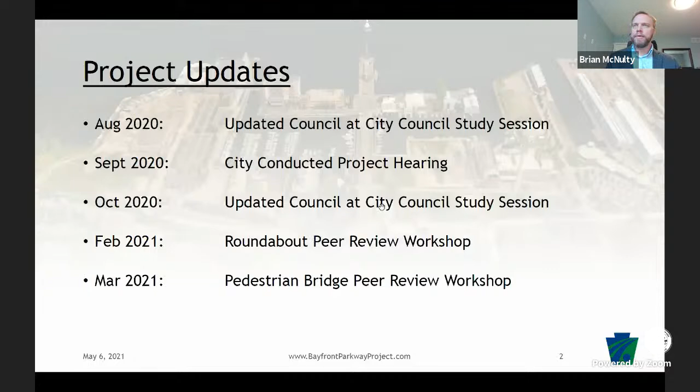Mr. Keys was the representative from City Council, but many of the organizations, including the city, the county, and others that we've been working with so far on our coordinating committee, were part of those teams. So thanks for the question, and thank you, Jen, for the intro, and thank you to council for having us again. It's been a few months. Good to be back with you.

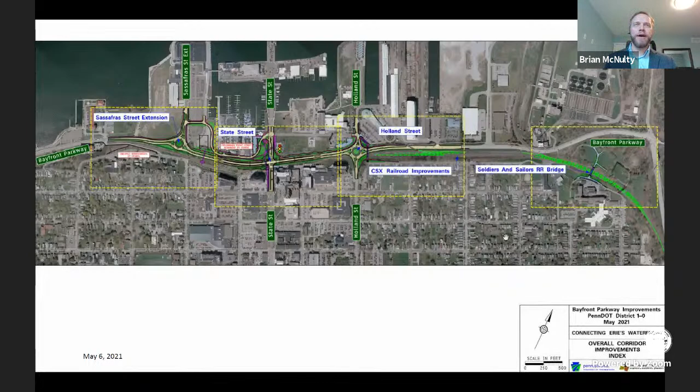Again, it's for the most part the three intersections of Sassafras, State and Holland Street as they intersect with the Bayfront Parkway. And then way off to the east, we have the Soldiers and Sailors Bridge, and we'll talk more about that next. This project is an ancillary project, something that we knew we had to get done before CSX would be able to relocate their tracks. So those green dashed lines show where CSX will be moving their storage tracks in the future, and we needed to build this bridge first. So this is a contract that is out there. We've opened bids on it, and we should all be seeing some action on that project very soon.

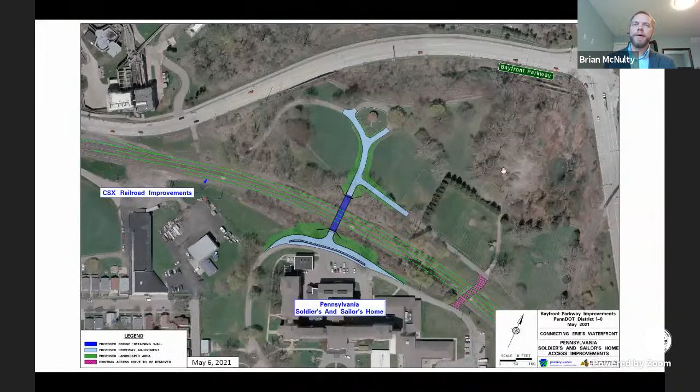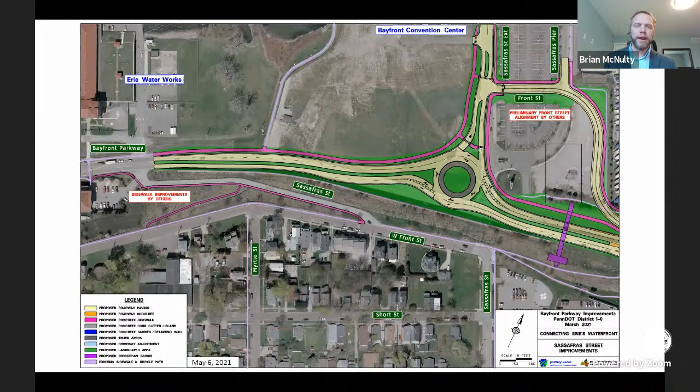So I forgot to mention that, I think, on the last slide, but overall, the preferred alternative for this project includes a pedestrian bridge at each intersection. We'll talk more about that, but as shared before, starting with the first phase of construction, we obtained the BUILD grant and other monies, and these pedestrian bridges at Sassafras and at State will not be part of phase one. Holland Street will have a pedestrian bridge as part of phase one.

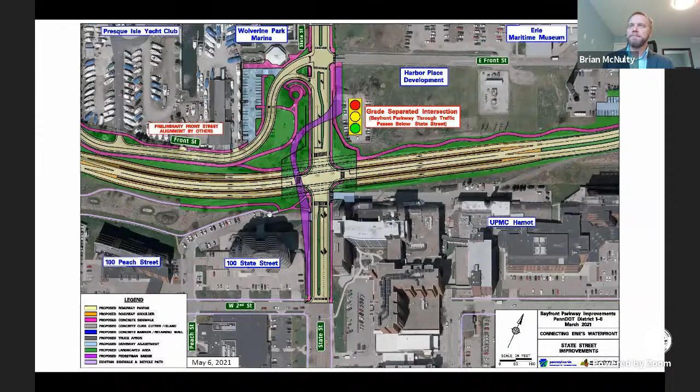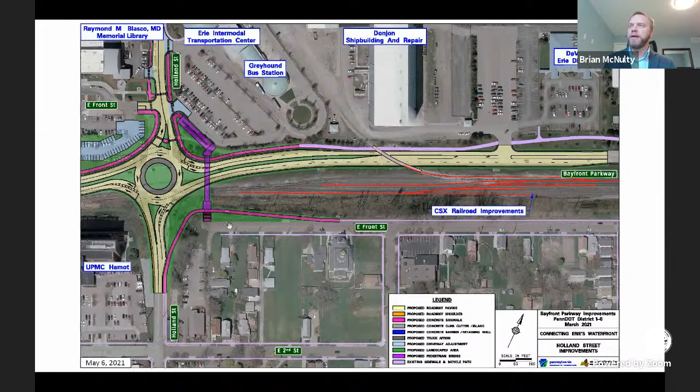So again, a lot of pink showing the connections of multimodal paths that don't exist today. That's a big part of what this project is. Kind of a boulevard look with some green space on State Street, and a lot of green space in the project in general. Here's Holland Street. This is the intersection where a pedestrian bridge will be included in phase one of construction. But similar to the Sassafras intersection, otherwise you've got green space, pedestrian connections, and a dual lane roundabout for vehicular traffic.

So the peer review was in response to some of the discussions that we had with City Council. We've attended, as Jen mentioned, three different meetings where we talked about and answered a lot of questions and concerns. This was an opportunity to bring in another consultant, in this case Kittelson and Associates. They are nationally known experts in the design of roundabouts, so they were tasked with providing a peer review of our roundabouts, specifically looking at traffic operations and geometrics, pedestrian improvements, and so forth. Kittelson and Associates is involved in a lot of nationwide research projects and guidance. They've got a great history and experience in this area, so they did a great job with the peer review.

I won't include everything that they did and shared with us, so this is just the high level overview. They looked at three different scenarios, increasing in roundabout size from one to three. Three being the current plan, which is shown on your screen now, a dual lane roundabout at every approach. Scenario two was to reduce the Sassafras Street entrance, or approach, to just one lane.

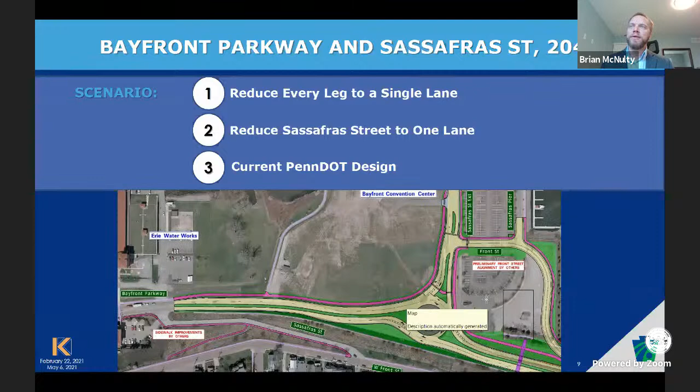Scenario two, on the other hand, was something they recommended as being acceptable. It includes a reduction in lanes on that Sassafras Street extension. Instead of 2 lanes entering the roundabout, it would only be 1. That was their assessment, and I should be careful as I'm speaking for these firms that do great work. They're the experts in these areas, not myself so much. So we have them available for more technical questions on the call.

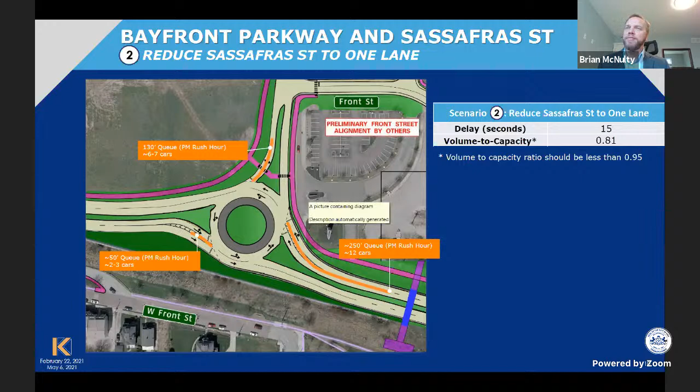This is a win for the project, I think, I hope many would agree. This is a place where now that pedestrian crossing is reduced significantly, and it really allows us to provide a bigger splitter island here, which again is an opportunity for green space, and more green space beside that lane as well. So I think the pedestrian experience would be significantly better crossing that leg of the intersection. That was one of the outcomes.

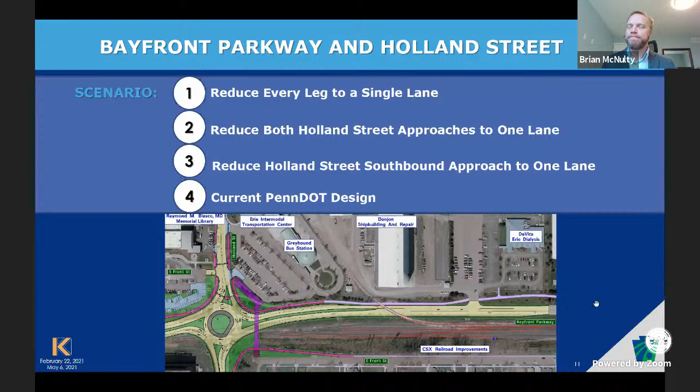They took a similar look at Holland, very similar look. In this case, they looked at 4 different scenarios. Of course, Sassafras is only a 3-legged roundabout, since there's no southern approach due to the wall and the bluff. In this case, we have a four-way intersection. So they looked at the first option, to completely cut it to a 1-lane roundabout on all approaches, then to just reduce Holland Street approaches north and south to 1 lane. The third was based on some of their findings that showed it might be an option to just reduce that southbound approach to 1 lane. As you can see in the plan, this is the current PennDOT design, which is scenario number 4, and that includes dual lanes.

Their findings were very similar, and ultimately through some discussion, determined that the same could be done here. So where the pedestrian crosswalk is on Holland, on the north side of the intersection, where we had 2 lanes shown prior, this would work. There would still be a queue. When you see queue, this is a 120-foot queue in the PM rush hour, approximately 6 cars at the PM peak that would back up on Holland Street with only 1 lane. That's something we can live with for the sake of the improvements gained. Everything's a trade-off in these areas, so that's a little bigger queue than was provided on the current design that had 2 lanes, but we can work with that.

Again, same benefits there, that the pedestrian crossing of that lane was reduced nearly by half. So that's another win. Volume to capacity is just a way to measure whether or not the designed or planned roundabout can handle the anticipated capacity. That's a ratio that, if you're doing this right, you should have a number less than 0.95, and that was just one of the many ways that Kittleson checked to make sure this would be acceptable.

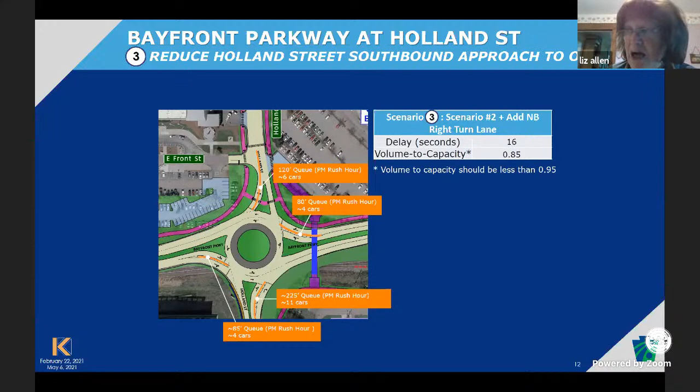My third question is, we do have a new administration since our meeting, our public hearing. We have a Secretary of Transportation who has made environmental justice a hallmark of transportation policy. We had an interesting meeting today about a totally different topic, and have heard that with a change in administration on a totally different project, not related to this, there will definitely be more attention paid to environmental justice. So I guess I have 3 questions.

Who's on the peer review committee? You can send me that later. Did the peer review committee agree on this, or was there still disagreement?

Because it doesn't help us to know that, okay, PennDOT changed its mind. What did the peer review committee, how many people are on it, and did they actually get to vote? And third, will the impact of having a new Secretary of Transportation cause PennDOT to rethink a $78 million project that goes through the heart of the city? Is there a way to rectify?

I was looking through some old stuff, and I happened to find a story from the Atlantic from 2015, How to Decimate a City. It's all about how these urban highways have to be fixed. So Brian, if you could kind of go through that.

Peer review committee, Biden administration, and then a pandemic too. I mean, work habits, has that changed? So it's a lot of questions, but hey, we haven't talked to you in months, so I'm going to take advantage of it. Brian, why don't we tag team this?

Because you're right, Liz, you have a couple subsections of questions there. So I'm looking at the attendees for the peer review, and Brian will send you the detailed list, but just for the good of folks watching: there were representatives from the City of Erie, Erie City Council, the Governor's Northwest Regional Office, Pennsylvania Department of Community and Economic Development, Erie County, Erie Community Foundation, the Bayfront East Side Task Force, our West Bayfront, UPMC, Erie Insurance, EMTA, Bike Erie, WQLN Public Media, Voices for Independence, and the Port Authority. I'm also seeing representatives from Erie Arts and Culture, Erie Events, Scott Enterprises, FHWA, the State Transportation Commission, and obviously PennDOT and our consultants. So I think we had about 35 people.

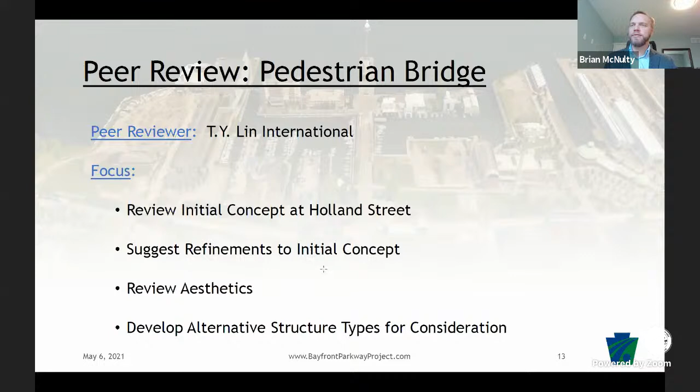It's a little different than the roundabout peer review. In that case, the roundabouts were probably further along in their design process, so maybe there were more technical aspects to look at. But again, it was an opportunity for an additional expert to just provide some ideas on aesthetics and structure. So that's what we'll talk about next.

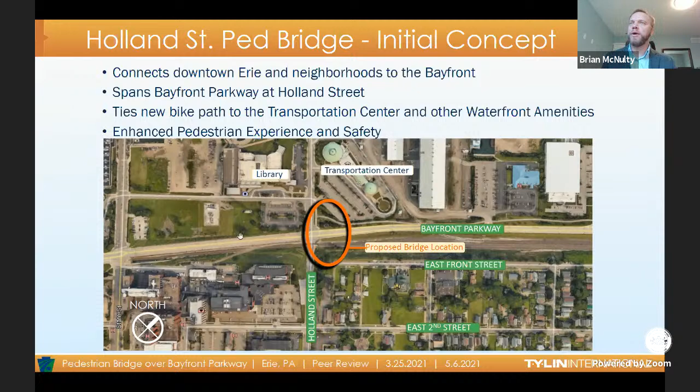The location, again, as we showed on some other slides, is near Holland Street. Based on feedback from multiple public meetings, the bridge is located just east of the intersection of Holland Street and the Parkway. So really it could take off from the bluff, sort of - there will be connections to existing sidewalks on East Front Street and on Holland. This is the location, and we heard positive feedback about it as part of our peer review discussion.

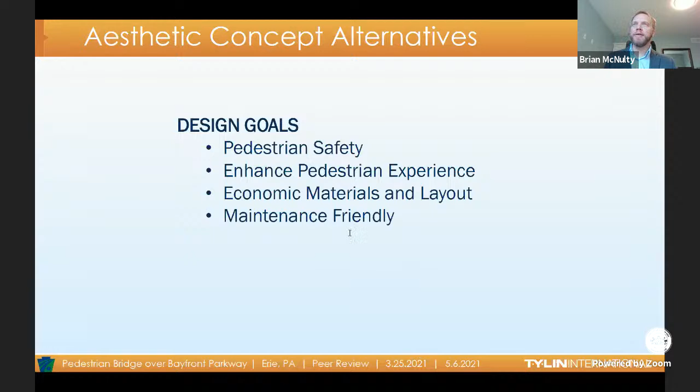So T.Y. Lin took this design, focused on pedestrian safety, enhancing the pedestrian experience. You have to consider the materials and the layout, the cost, the constructability, the impacts potentially to utilities or other things. And then, of course, maintenance has to be part of what we are still talking about here. So I'll show you, I think, 6 different concepts.

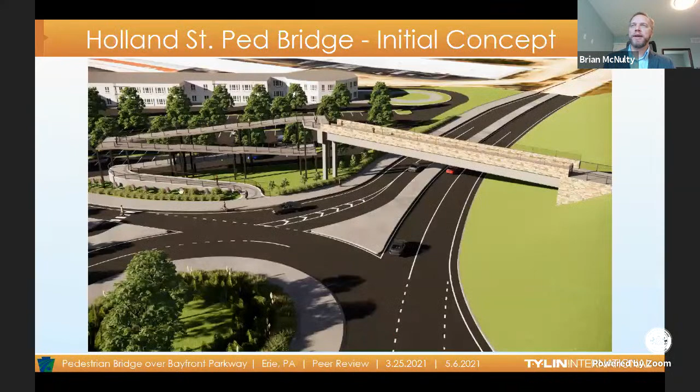So as you can see, I'll go back two slides. This was a little more significant of switchbacks, looks a little more daunting. This is a little more palatable, I think. But again, part of the benefits—I'll show a couple images of each of these, what it would look like from different spots.

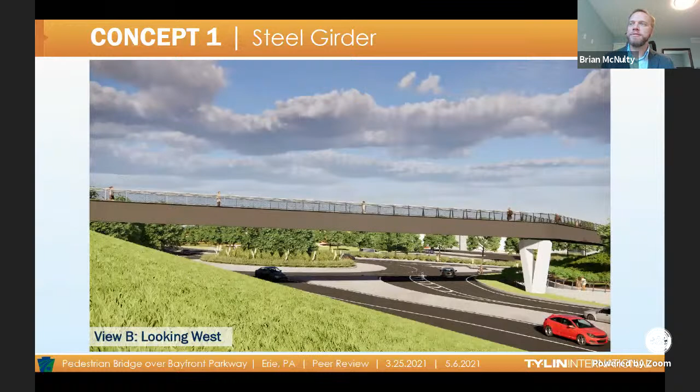This is just a simple steel girder bridge. There would have to be some kind of a safe railing on any structure that we choose.

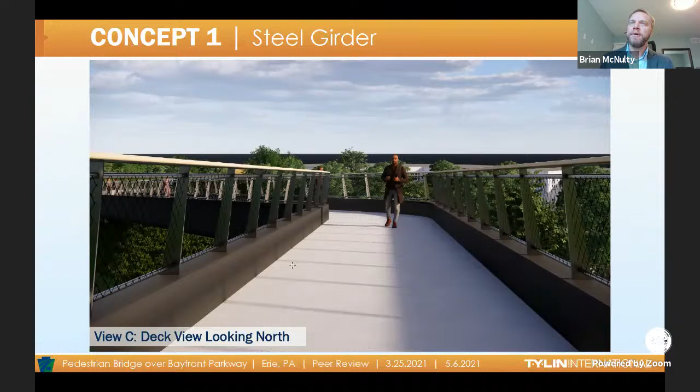In this case, we're still showing the same kind of ramp on the north side, but all of the different images I'm going to show, some include different types of ramps, different types of structures. They're all sort of interchangeable. We've got a lot of flexibility in that regard.

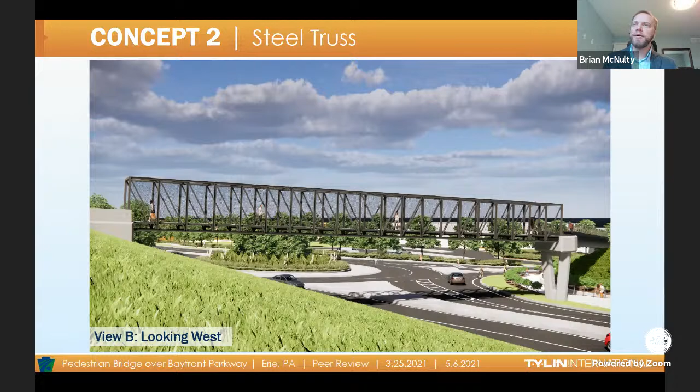A truss is kind of a see-through look more so. Some might like that, some might not. So there's the notion that you feel a little bit enclosed maybe in a truss. Some might feel too exposed because of the way we have it shown here.

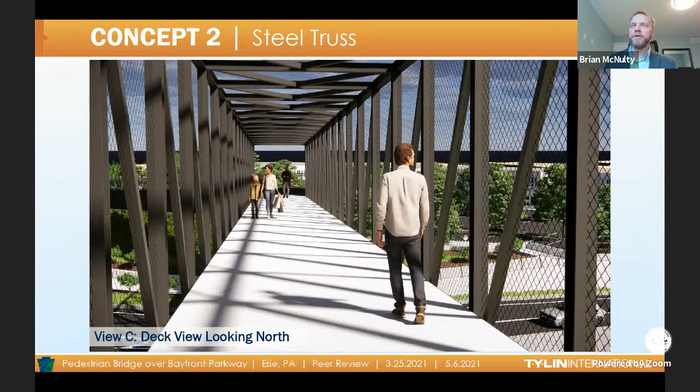We could include a railing with this option. We could also easily include a roof on a truss. That would be a pretty simple task to do. We can include a roof on almost any one of these options that I'm showing you, and we talked quite a bit about that throughout the peer review.

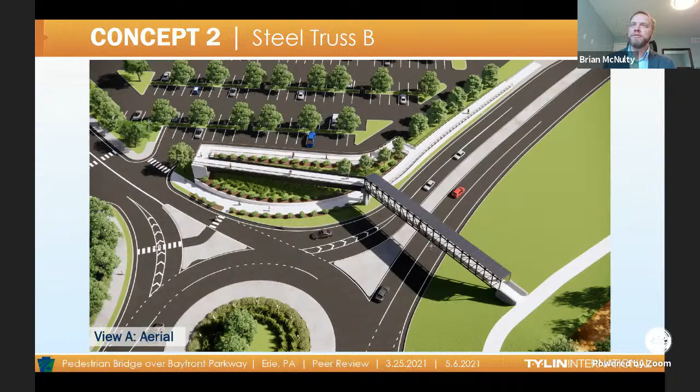And I'd say that there's no strong consensus, but a good point was made that pedestrians or bicyclists using this bridge are exposed to the elements on the trails and sidewalks everywhere else they're going. So is there really an importance to shield them from it while they're crossing the bridge? There's a couple pros and cons, I would say, to that.

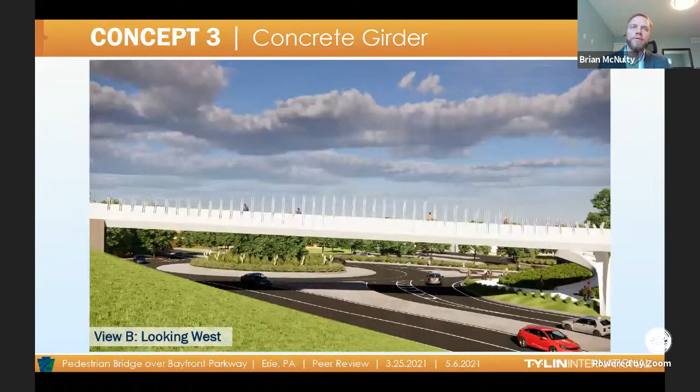But this introduces a little bit of curvature, a little bit more interest, a different type of ramp again in its orientation. And you can see the opportunities for landscaping, public art, lighting, that type of thing that would exist along the path, along the ramp, and in those green spaces. Some more views of the same bridge, what that kind of curvature would look like.

And we really, really appreciate the work again of T.Y. Lin here and their vision. Great stuff.

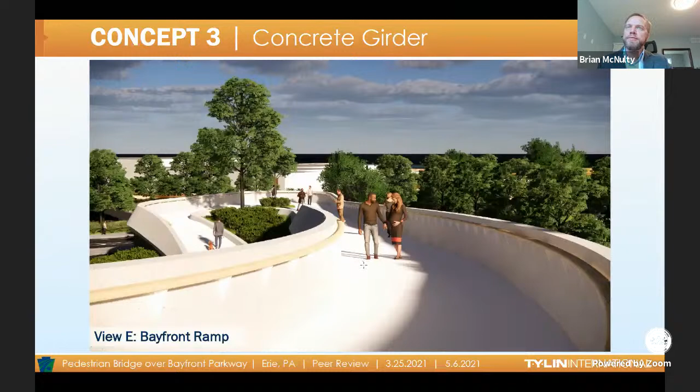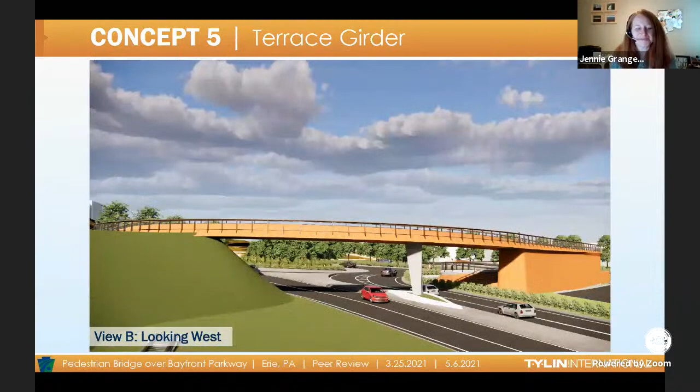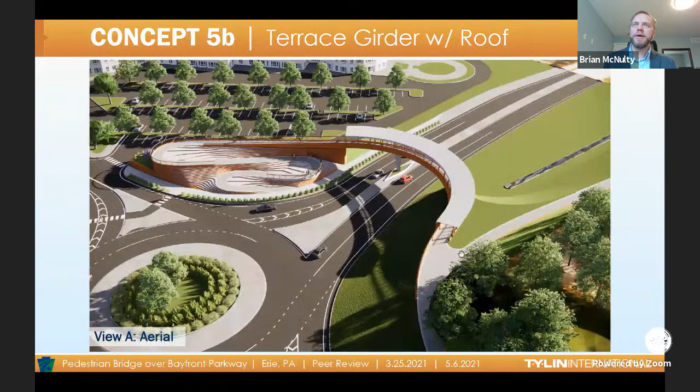Obviously there's different colors, treatments, and materials that could be part of any of these, really. So these were just some ideas. There's another view of the same, again, with a roof. So a roof could be added to any of the ones I think that I've showed you so far. Some it might kind of hurt the appeal of it more than others.

Really a great look. We got great feedback, as Jen mentioned, on all of these ideas, probably some more than others. Again, we didn't vote on it - that was not the purpose of the peer review committee. The purpose was to have some conversations and make sure we're getting everybody's perspective in the discussion. We had a lot of great discussion as we talked through each of these concepts, and that included various ideas.

One of them was presented for whichever bridge we choose. It was asked if there's an opportunity for some kind of a gateway welcoming pedestrians and bicyclists to the east side neighborhood - could that go somewhere in the area of where the bridge lands or takes off from? Absolutely, we can work on that.

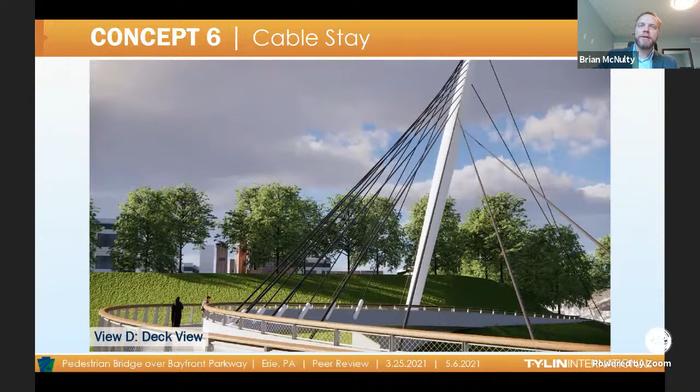So again, I think we got a lot of approval. I think we got some images that touch on the iconic look that many are after here, and some pictures that we just hadn't really shown anything like that.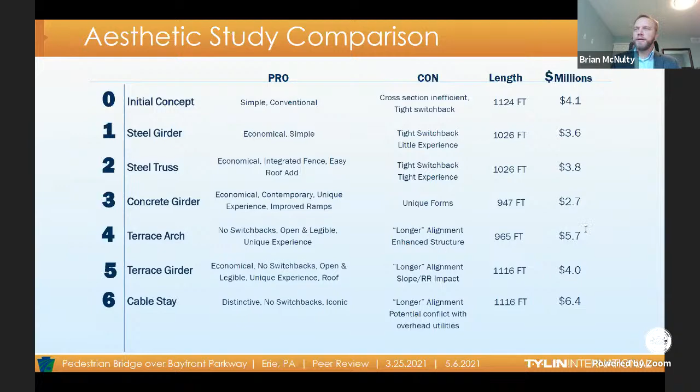So that's it for the pedestrian bridge, and this is just the summary slide again of what we gained from both. I'll go over that real quick again.

Reduced approaches at Sassafras and Holland, reduced pedestrian crossing distances, more green space, larger splitter islands, opportunity for raised crosswalks if we can discuss that with those who will be responsible to maintain that. And similar with the pedestrian bridge: a reduced structure depth, a much smaller switchback ramp, and of course a lot of different aesthetic options.

So I'll pause there, Mr. Keys, if there are any other questions.

I'll speak first, since it's not really in the footnotes where everyone else was available to hear that. I did bring forward the idea of putting an elevator on the north side, a structure that goes into an elevator, just because the length from where you get on Holland Street to where you depart is nearly 1/4 of a mile on average, and I'm a little worried about whether people will be able to travel that far if they have mobility or motility issues. So I just wanted to put that forward first, and then I'll open it up to my colleagues.

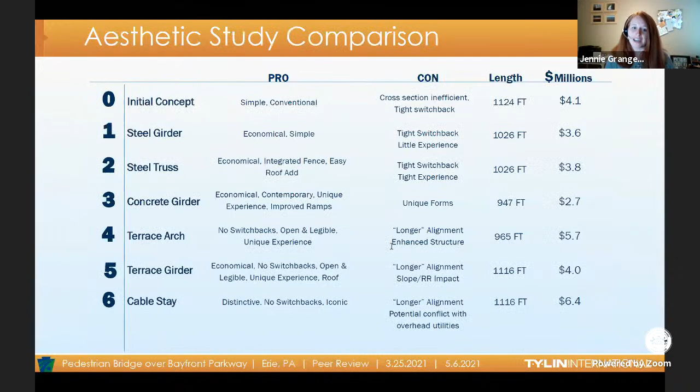There's a lot to consider here for sure. And that's a great point that I don't think anybody had brought up yet. So thanks. And Kathy, again, safety is our number 1 priority. We want it to look good, but it has to be safe. So I think your point is well taken. Well, you also got to consider the skateboarders. Mel, are you with me on that one? Yeah, because I mean, it's beautiful, but a lot of skateboarders coming around that curve, kids see it, they're going to try it.

Brian, if I could, a question about the footprint of that switchback. I mean, we're landlocked, we can't do anything else, we can't take out a row of parking. It's like we have so much square footage and we're kind of squeezing this thing into there. I do like the design of it, but we can't do anything else about the square footage, correct?

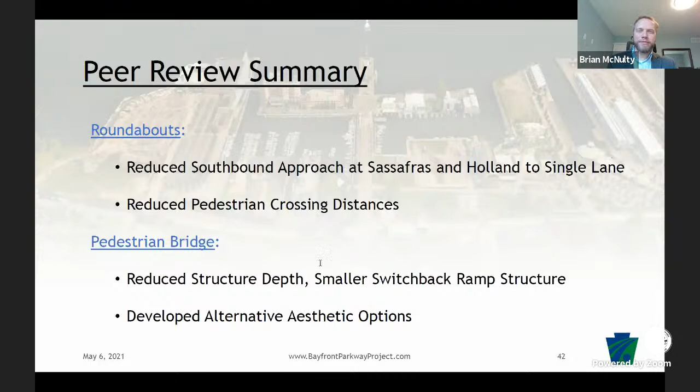We can't reduce the length of it, so no, I don't think so. I mean, we can't take up any more parking or space so that this ramp could be more gradual. I see we can't go past the limitations because every design is kind of cramped up on the corner here. I don't know if we could extend further and take out a row of parking, or if the intermodal is going to allow that.

Yeah, not so happy Dave, with that. I will tell you that was a conversation Brian and Tom and I had with TYLin, and we told them for many reasons, not just the impacts to the parking, that we wanted to stay within the existing footprint.

Okay, yeah, then again it's a challenge. I kind of do like the designs, but the maintenance of the ice and snow is going to be an issue, as it is anywhere in Erie, especially on the ramp surfaces here. So it's definitely going to be an issue.

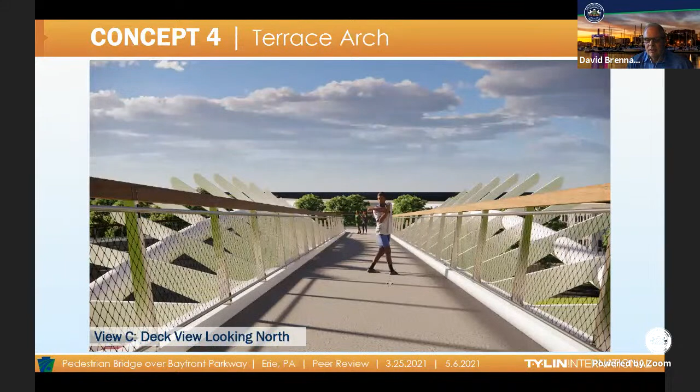Of course, I'd love to see an elevator if possible, especially for people who can't transverse that. And that's why, again, we'll provide that information. It's in the memo, and I think that was one of the concerns, the snow and ice on the Terrace Arch.

Brian, can you just back up one? So the great thing about that is you have your ADA compliant way the whole way down, but then you have these side egresses of steps that people could sit on and have a coffee and take in the surroundings. But again, in less than ideal weather, they are also another surface that needs to be cleared. So that would be one of the downsides to that Terrace Arch concept.

A couple other things. So what will the process be? I know it's a tough part to actually make a selection. I know money, there's maintenance, there's all those things to be considered. So this is the menu, it needs to be sorted through. But who's going to be the jury to do that? Is it just going to be a PennDOT decision based on what we see, and then we'll just find out what that is?

No, that's a great question. There's a couple different avenues that we need to take. We have public involvement, additional public involvement planned in the near future. So this summer, we expect to go out and give the public an update. That would be in addition to these quarterly meetings where we'll be visiting City Council. So a separate PennDOT-led public meeting. Part of it will be to share the information, what's new in the project, which would include some of this information. Now, again, this is an unusual situation.

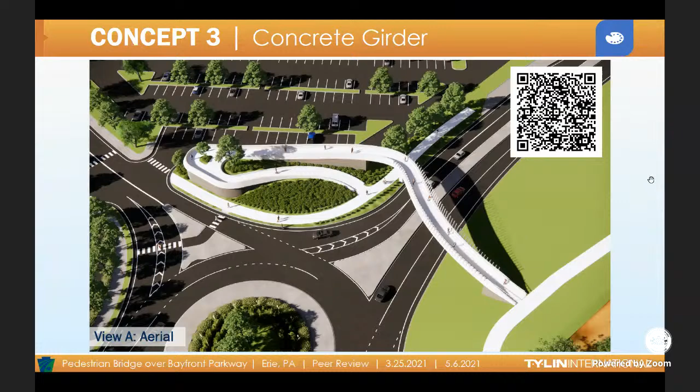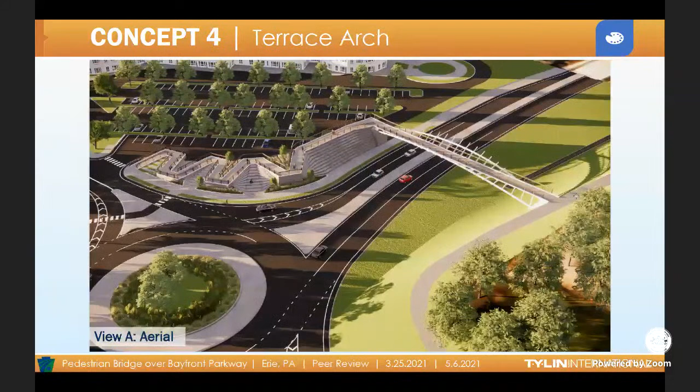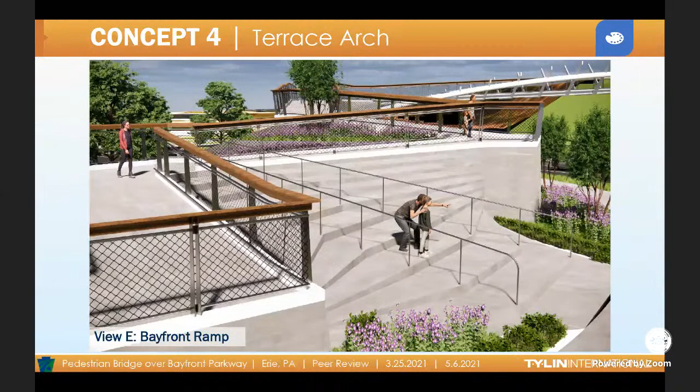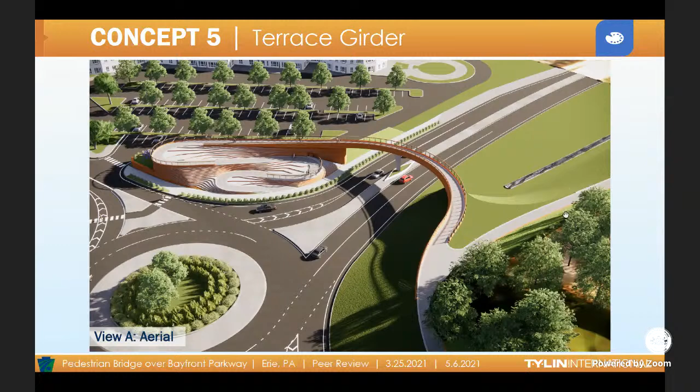Ms. Granger, Jim Winarski here. Thanks to Mr. Frank for getting me on, but I just want to say, yes, it knocked my socks off a little bit here. Very impressed. It's a great update, great presentation. I like the proposed modifications that PennDOT has come up with. David had great questions, Liz had good questions. I mean, a lot of these concepts, I don't know if there's one I don't like, to be honest with you. It's pretty cool that there's that many options. I hope with that many options it doesn't take longer to happen, but I just appreciate the work that is being done and the updates that you've given council, and look forward to moving forward with this project. So thank you all.

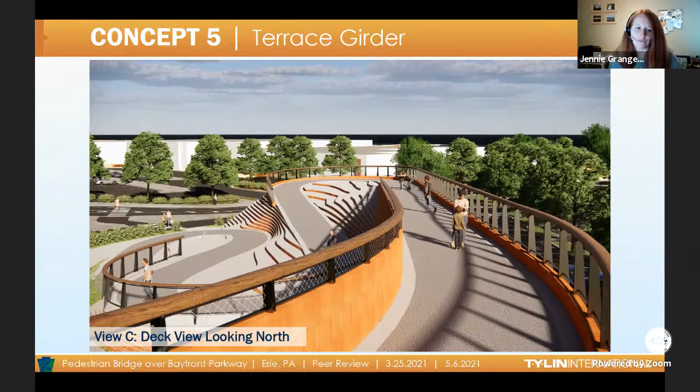Thank you so much. Again, thank you. I know several of you were incredibly frustrated with the process for a while, and I want you to know we heard you. So again tonight, and for the peer review committees, I can't thank the folks that sat on those committees enough. Again, everybody didn't have to agree 100%, it wasn't meant to do that, but those folks put in some time and provided us with input, and we went forward.

So I will try, Mr. Keys, as long as you're okay with that, I'll try and ask a couple more of these questions in the chat box and have Brian or myself answer them. Do you want us to keep moving forward? I don't know what else is on your docket for this evening. We have nothing else but this scheduled for this evening. You can continue to answer the questions.

Okay, thank you. So Brian, the next one is: can we incorporate stairs that would reduce the length of the walk for those that welcome stairs for a quicker route? And could those stairs include a bike tire trough to offer a cut-down route length for mingling bikes and pedestrians?

Good question, I think that can be considered. There's always an effort for pedestrians of providing the same sort of start and end point, whether that's somebody in a wheelchair or walking down steps. That's something we strive for where we can. So I think that's part of the reason you see some of the designs we've shown. But I don't think a staircase with a bike trough is out of the question — we can look at that.

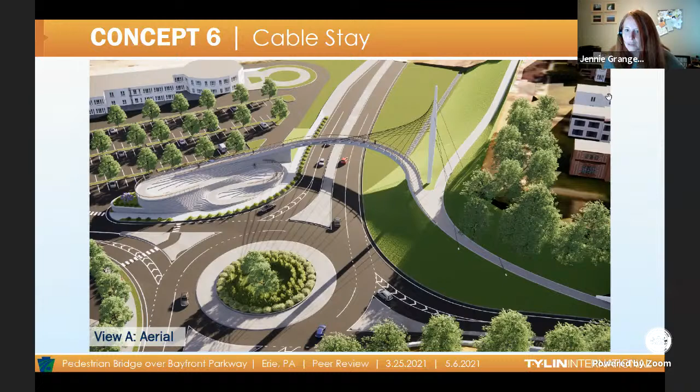So we have a little bit of time on that, and I don't want you to think this is like an open checkbook. We take the budget very seriously, but I think it was a great question in the panel. I know there's a couple other comments in here, but for the good of the group, those look to be the majority of the questions. I'm just double checking.

There is a little bit more I'd like to share beyond the peer review. So maybe we'll pause on those questions. I'll share this information, and we'll check back in with council.

This is State Street. What you're seeing on your screen is pretty self-explanatory, but on the left is the existing conditions. So if you're a pedestrian crossing the Bayfront Parkway, you're crossing a distance of 86 feet roughly from curb to curb. It's a long crosswalk. In the middle is what we've shown you all in the past, where we cut that length almost in half. This is where the controlled pedestrian crossing would be, with a pedestrian signal head and push button, everything ADA compliant.

That was 46 feet. Now, one of the comments we had, and some discussions with the city engineering department since then, is that the radius of those curbs really affects how long your crossing is at an intersection. We had these radii designed for certain truck turning movements, and the city was agreeable to tighten those up a little for the sake of the pedestrian. So this is another improvement made for pedestrian sake since then. Because we tightened up each of those radii, we were able to shorten the crosswalk distance again down to 31 feet. You probably have very few, if any, streets in the city with such a short crossing, and again, it will be controlled.

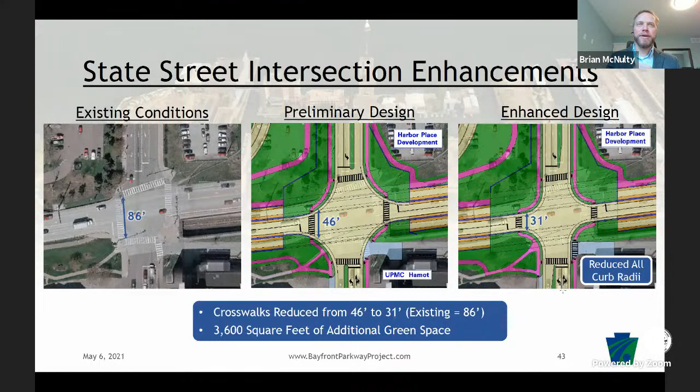Okay, are there any other questions on this change? I'll move on to the next item. If you think this is an ugly slide, it's because it's the only one that I put together myself - this is my handiwork from about 20 minutes before the presentation.

I was reviewing some of the correspondence we had with City Council as far as requests, recommendations, and what we were committed to as far as the peer reviews. One of the things mentioned was widening what you might call the cap or the bridge at State Street. In this 2D plan view, bird's eye view, what's outlined in that big thick red line is what you might call on structure - that's really the bridge that will be built to span over those through lanes of the parkway.

So the question, or maybe the thought, was can we widen this? Just wanted to point out, right now this is a 230-foot wide bridge deck, and it already includes quite a bit of green space.

Now, could we extend that further? Yes, we could, it's feasible. It's possible, but it adds quite a bit of cost, and 230 feet is pretty wide as it is. If we extended it, we could extend this line further to the west, but this point right here still holds, because this is the ramp coming up, and that's where the crosswalk would be. So we really can't push the ramp farther to the west, because then it would start to interfere with the next intersection, which is Sassafras, and the same goes on the east side of the intersection. So we really don't see the value gained for the investment.

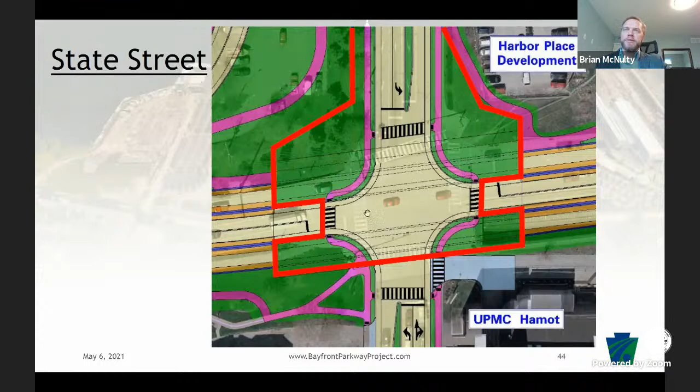Yeah, and at least for what we have shown here, to Jon's point, what is currently parking lot will become additional green space. So I would agree. If I can cut in, I saw Mel Witherspoon raise his hand. Do you have something to add, Mr. Witherspoon? You've been quite patient. No, it was answered. Thank you.

Our next steps include peer review collaboration, further discussions about the Holland Street selection, and maintenance agreements, which will be very important—not just for bridges, but for all planned amenities like landscaping and lighting. We're anticipating opening bids in the spring, about a year from now.

Everything I've shown you tonight will be on our website, including the entire presentations from the peer reviews and the meeting minutes from those meetings. So if you want more details about what was discussed, that's all available.

That's all we have as far as the presentation goes. Mr. Keys, if there's anything else, we're happy to answer questions.

I have one more comment about the pedestrian bridges—there's been concern about the length of travel and the slopes. In the Bureau of Engineering, we did preliminary work on a tunnel just west of Holland Street that would function as a shorter pedestrian tunnel, but concerns were raised about safety and lighting. It may have been ruled out at the time, but it's still on the table if the bridges become objectionable or a cost or travel distance issue, and if safety improvements could be made—there is a tunnel option that works grade-wise. So, Jon, travel distance.

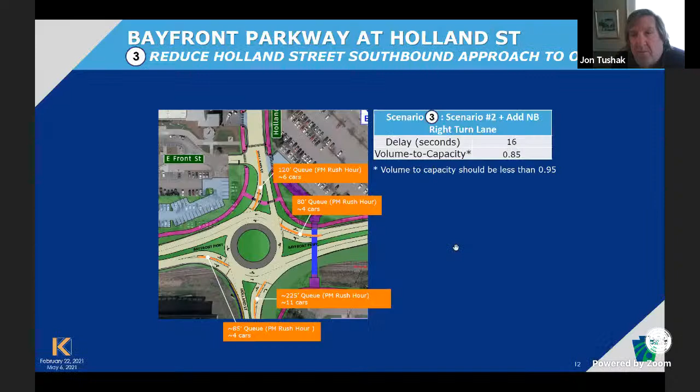One lane, right? Am I right? One lane for Holland on the north side. That's what I thought. Okay. Thank you, Brian. Short-term memory loss during a study session, but I was pretty sure that's what you had shown. So thank you, Brian. Thanks.

Before we get too far off the pedestrian and Holland Street issue, correct me if I'm wrong, I don't have this number on top of my head, but does the existing slope of Holland Street exceed 5%, and possibly even 8%? Yes, you're absolutely correct. Right, so if we were providing an at-grade crossing at Holland Street, we would be leading to it with a slope that exceeds ADA.

But by leading them to the bridge, we can achieve ADA. That's a reason to lead them to the bridge, and then possibly even remove the sidewalk, so that anybody who was a diehard and wanted to walk through and cross that grade could still do it. But if we even eliminated the sidewalk in favor of pushing everybody to the bridge, there would be an ADA accessible route, where on Holland Street at grade there would not be. Great point. Yep, one of the benefits of doing it this way, in our mind.

Any other comments by any other council members?

Brian, I'm one of those people who, my friends actually, the ones I walk with, call me Cutter, because I like to find the quickest way to do things. Like on 38th Street over here in my area, where it says no pedestrian crossing, I cross, and almost got killed the other day. That's another story, because I don't want to go all the way down to McClelland and cross there and go up 38th Street when I can cross 38th Street to get to my house faster. So I'm going to be one of those pedestrian crossers, even though technically I know it's not the safest way. Will there be a pedestrian signal for me to cross? At Holland Street? No, there's not. We don't have one planned. Okay, thank you.